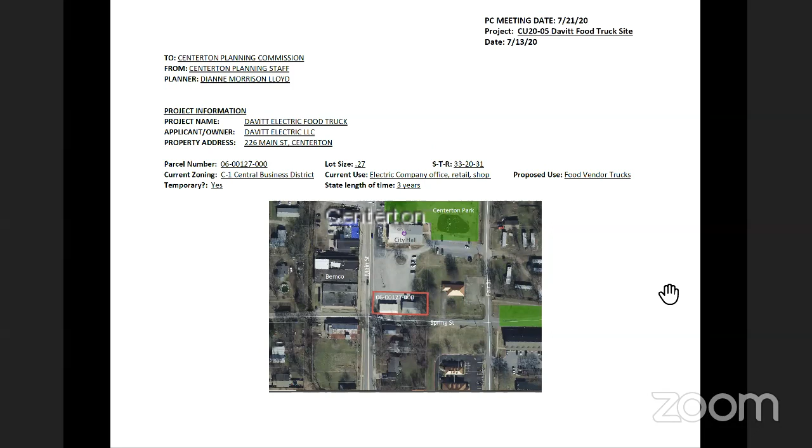All right, thank you. Dianne, do you want to take us through the proposal? Sure can. As Bethany stated, this property is by City Hall, on the south end, basically of the Bemco parking lot by Spring Street. It is zoned Central Business District, and they are looking for 3 years for this particular food truck. And like she said, it would be different ones, not just a certain food truck. It would be different vendors that would come into that location.

There has been a conditional use for a food truck previously, but it was north, kind of where the light pole is. Oh, thank you, Nicole, you're so good. But that's technically not their property. So we were looking to try to find a spot that would work for them on their actual piece of property there.

There's not going to be any outdoor changes or anything structural. The water, the tenant's truck or trailer will be self-contained. Davitt will provide electricity, which is very fitting since they are an electric company. The hours of operation will vary depending on whom is renting the space, probably between 8 a.m. and 8 p.m., nothing that's going to be really late. Typically it's going to be 1 to 2 people working there, since there's not a whole lot of room in a food truck. There's no signage proposed; any tenant would have to make an application to the city for a sign permit if they do any additional signage, like a flag sign or anything to that effect.

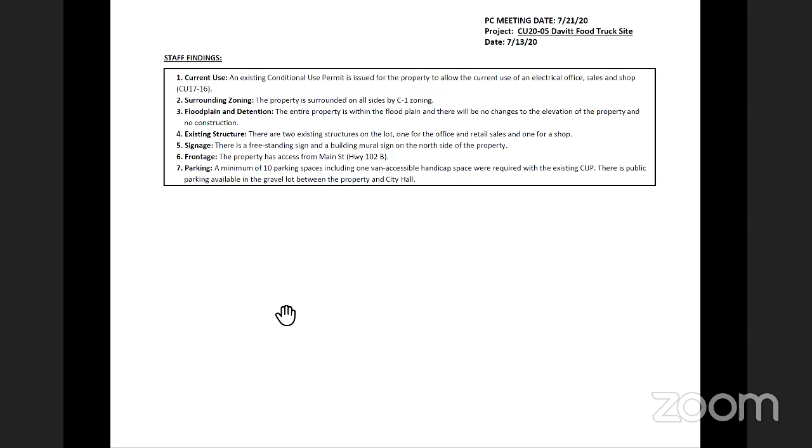Okay, Nicole, can you scroll over to some of those, please? There we go. They are requesting 3 years for this permit. If that is acceptable with you guys, you can do the 3 years, so it would not expire until 7/21 of 2023.

This would make it easier for the property owner, so they don't have to come in every summer if the snow cone person wants to be there, or every time they find a food vendor that wants to locate on their property, since it takes time to get all of this done. We have done 3 years before; I believe the one we just did for the Woo Pig Mooey was also a 3-year term.

One thing that's particular with this site, because of the regulation that the truck has to be 10 feet from the existing structure, one possible condition would be that any front-facing truck or trailer facing Main Street, not be longer than 19 feet, be kept on their property and away from the building.

Then I do have on here, as I said, that they have to have 10 parking spaces with their current conditional use. For a food vendor in the city, we don't have any specific requirements for parking at this time, but if you guys wanted to make any conditions on that, that would be up to you.

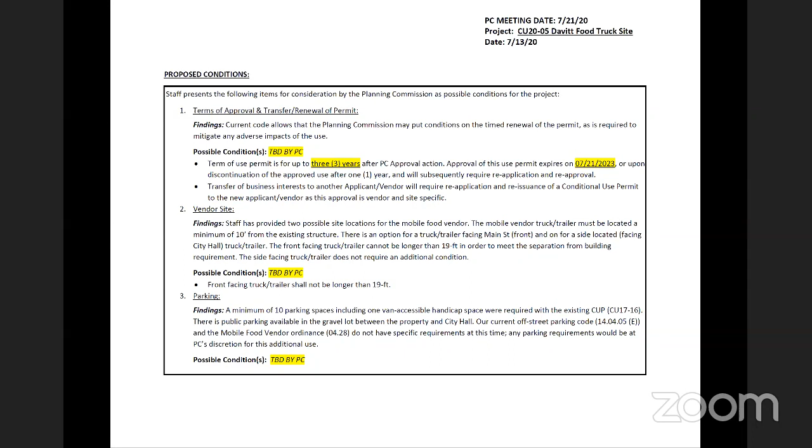Okay, do any of the commissioners have any other questions or comments in regards to any of the conditions, the 3 years, the maximum size of the truck, and the 10 parking spots, one of which will be designated van accessible handicap, which is actually already there.

Hi Jeff, this is John. I just had one quick question. It was mentioned about the electric requirement. Is there a requirement for additional trash or waste disposal or food disposal that would be required for that? Obviously not dumping food in a regular trash can. Is there an additional requirement for that, or?

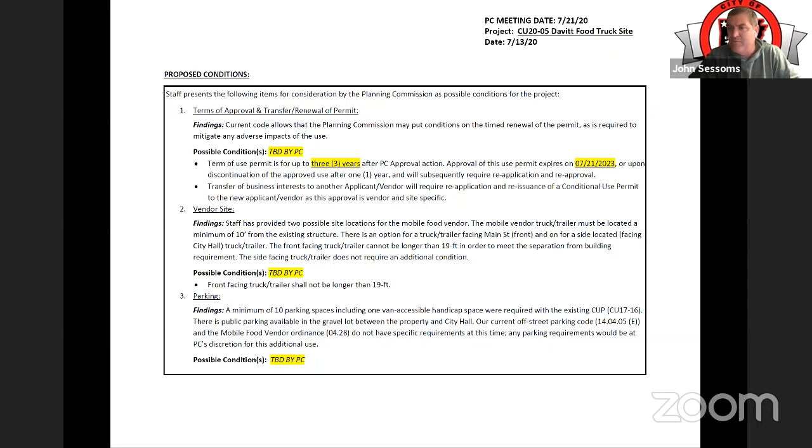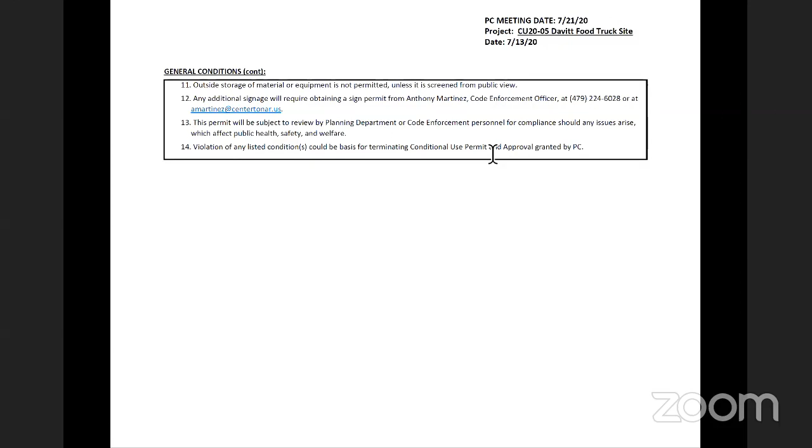We don't necessarily put anything on that. We would rely more on, I guess, the health department or whoever would approve it, to kind of police the way that they would take care of their waste. But as far as trash, like from the snow cones or the napkins and so forth, we do police that part.

If they were going to dump grease and needed a grease receptacle, we'd want to make sure it's in the right place. We've had some of those in the past where they've actually requested that, and we've talked about it having a designated spot.

Okay, that was more my question about hazardous disposal, not necessarily trash. Thank you. I think when I spoke with Bethany previously about water and wastewater, she said they would prefer people to have their own self-contained trailer or truck, so that everything goes with them or comes with them each day.

And Bethany, I will unmute you if you want to go ahead and answer that question, just to make sure I wasn't telling a fib on you. Oh, no. Can you hear me all right?

Yes. We fully intend for them to take any waste that they have with them. Of course, we like to keep it clean, so we won't be allowing anything to be junked up or anything like that.

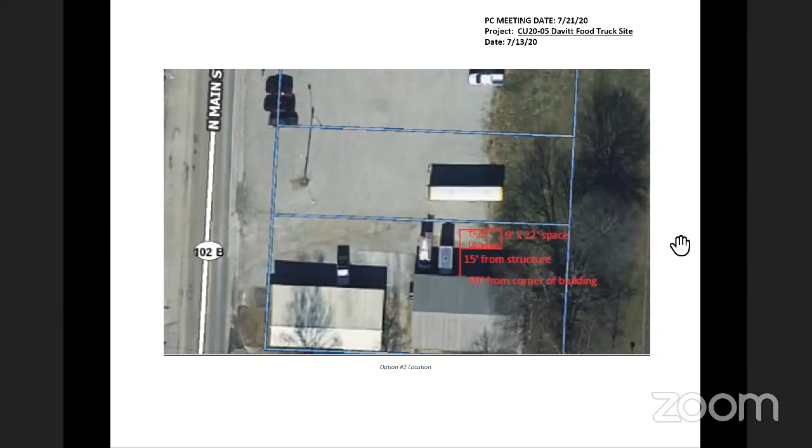They do have two options for the siting on that spot, and the condition would just be on option number 1 as far as the length. Okay, then I'm good with that, I guess, if everybody else is good with that. I just wanted to make sure you guys were all aware that it's basically the same space, just two options for how it would be sited on that spot.

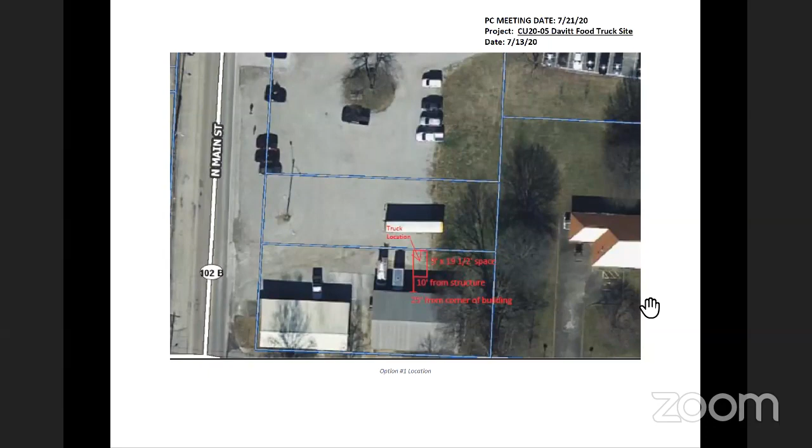Okay, and just option 1 with the north-south, the east-west facing truck, would have to be the 19.5-foot length maximum. You guys can say that in your motion however you like.

All right, if there's no other questions or comments from any of the commissioners, I would entertain a motion. I'll make a motion, this is Tiffany. I'll make a motion to approve conditional use 20-05 Davitt Electric mobile food vendor parking with the conditions as stated, depending on the orientation of the food truck, for a 3-year time period and 10 parking spaces, and any other comments that would be subject to this.

Devin, I'll second. All right, we have a motion and a second. Todd, if you'll do a roll call for me.

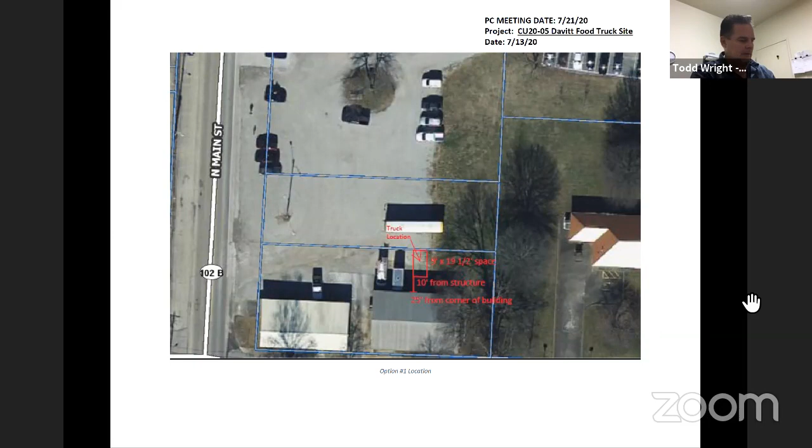John Sessoms, yes. Jerry Harris, yes. Tiffany Morris, yes. Amber Beal, yes. Greg Langford, yes. Devin Murphy, yes. Joey Engel, yes. And Jeff Seyfarth, yes. Thank you, Bethany, and good luck.

Thank you, guys. All right, next on the agenda this evening is our second public hearing. This is for rezone 20-14, Steel Development, Fox Haven on Bliss Street. This is from A1 to R3.

And so with that, I would entertain a motion to open the public hearing. This is Amber, I'll make a motion to open the public hearing for rezone 20-14 Steel Development Fox Haven from A1 to R3. This is Joey, Tiffany, I'll second. All right, we got a motion and a second.

Is anyone opposed? All right, is either Tony or Ferdy on the phone to give us an overview? Ferdy is there and you should be unmuted, Ferdy. Hey, Ferdy, do you just want to give us a quick overview? Try now. There we go. He's good. Hello? Yeah, go ahead, Ferdy. Okay, good deal.

Okay, so this request is for a 2-acre rezone that's south of a 4-acre request we made earlier this year, which we had to do because of the lot split we submitted last year. Since then, we've actually decided to proceed with the subdivision here, so we had to add this area to the south of that request to allow that subdivision to proceed.

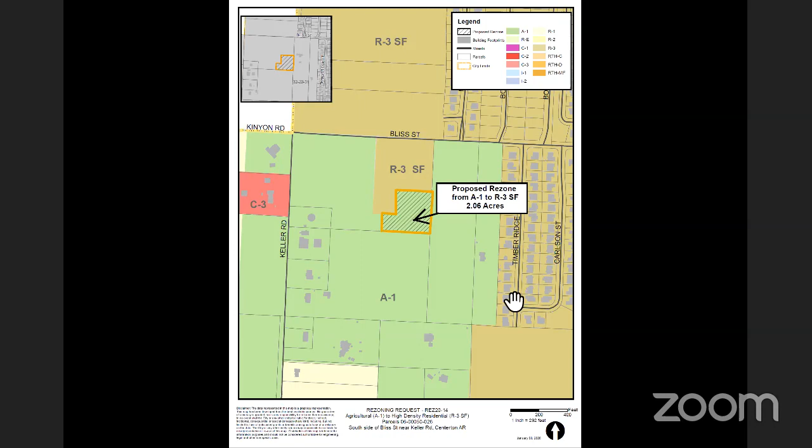Of course, the high density residential is intended for single family dwellings with minimum lot size of 6,000 square feet, with 25-foot front, 20-foot rear, and 7-foot side setbacks. The access would of course be there from Bliss Street, which is designated as a collector on the current master street plan.

Which has a minimum of 60 foot of right of way. And with their subdivision, they are going to be dedicating right of way for the future street improvements there. On the proposed master street plan, whenever that is finally done and approved, it is going to be a minor arterial with 90 feet of right of way. Since this is just a rezone and not the subdivision, I can't tell you the exact right of way being dedicated, but I know it definitely meets the current master street plan.

It is surrounded, as you see, by A1, but anything that is not the agriculture property is R3, which is what they are requesting to be rezoned to. So we do consider this to be compatible with the adjacent zoning. The current land use plan does show this as a mixed use area, so that means you could have high density residential, commercial apartments, all kinds of different things.

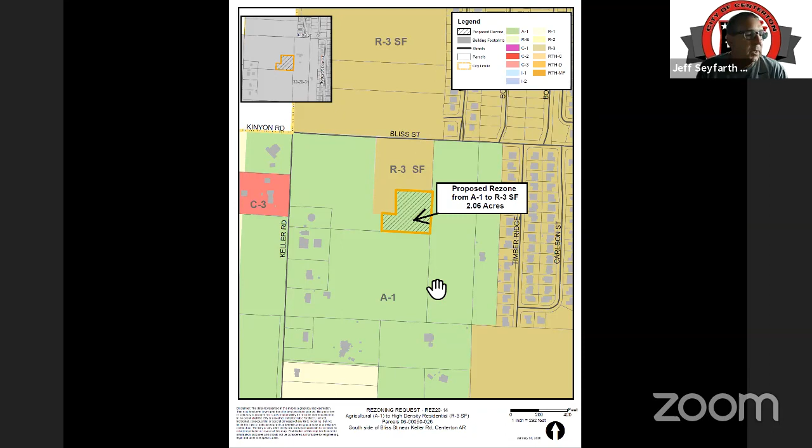All right, let's go ahead and go through our considerations that we have to go through. And the first one is, is the rezoning consistent with the adopted comprehensive plan, including the adopted land use plan? If not, why? I would say that, based on the plan that's there along with the surrounding property, that this one would be consistent. Does anybody disagree with that? So Todd, we're okay on that one as well.

Is the proposed rezoning compatible with the surrounding area and zones? Again, there is some high density single family residential around, including the parcel that's going to be with this. Does anybody disagree that this would be compatible with the surrounding area? So Todd, we're good with that one.

Would all the permitted uses in this new zone be compatible in this location and surrounding areas? They are asking for R3 single family, so this one would, in my opinion, be compatible. Does anyone disagree with that?

Would the rezoning provide a benefit to one landowner but not be considered for other similar properties in this area? I'm going to say the answer is no on this one. Would you all agree with that? And then if the public is opposed, why? Are the objections based upon factual information relating to this request or opinion based? We had no public comment, so we're okay there.

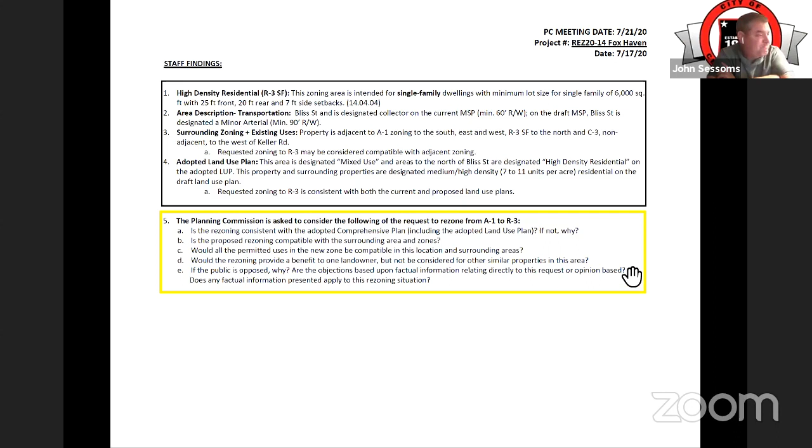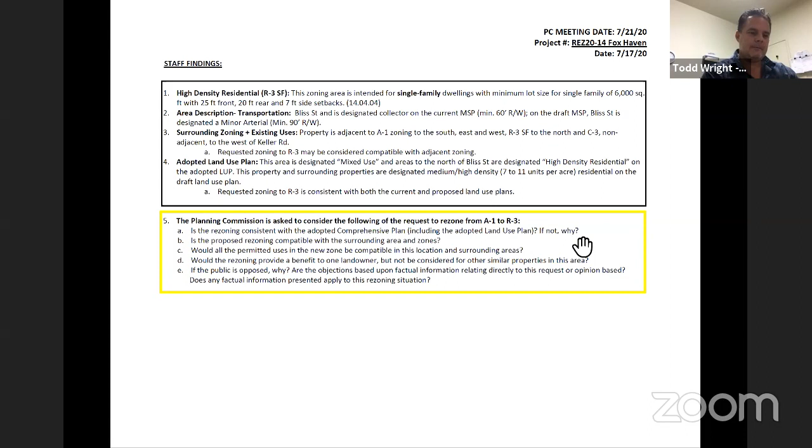We'll start with you again, John. John Sessoms, yes. Jerry Harris, yes. Tiffany Morris, yes. Amber Beal, yes. Craig Langford, yes. Devin Murphy, you bet. Joey Engel, yes. And Jeff Seyfarth, yes. All right, thanks, Ferdy.

Thank you very much.

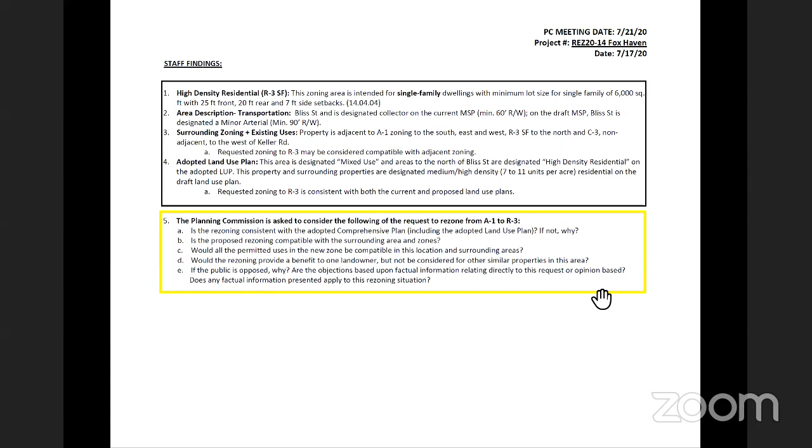All right, next on the agenda this evening is development 20-03, the Woods Commercial Development. This is at 5830 Brookside Road, and this is I-1.

Donna, do you know if they were able to jump on yet? I see Tim, but I don't see Ken. Tim, are you speaking, or should we postpone this until Ken gets here? Tim, are you there? We're all here. Got the client and Ken and I together. Okay, perfect. Thank you.

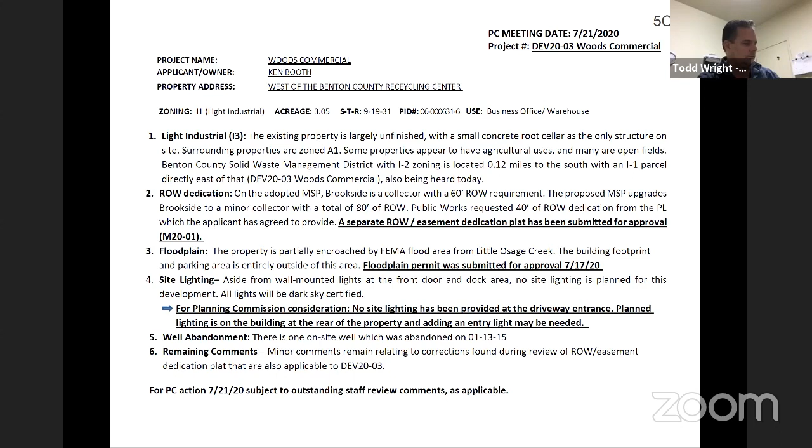Do you guys want to go ahead and just give us a brief overview for the planning commissioners? Yes, be happy to. Basically, we've got a commercial project on Brookside Road. You had actually seen a commercial development and approved a large scale several years ago, I think, on this piece of property with maybe 3 or 4 different buildings. Basically, that development didn't go through, and our client, Greg, has purchased that and wanted to downsize that commercial operation to fit his needs.

So we've got a lot less footprint of pavement and buildings that will be going on this site. It's next to the Benton County Recycle Center on Brookside. Mr. Woods runs a business doing insulation work and other specialty work for residential construction, so subcontracting work. This will be his office and warehouse location for him and his employees. Be happy to answer any questions you all may have.

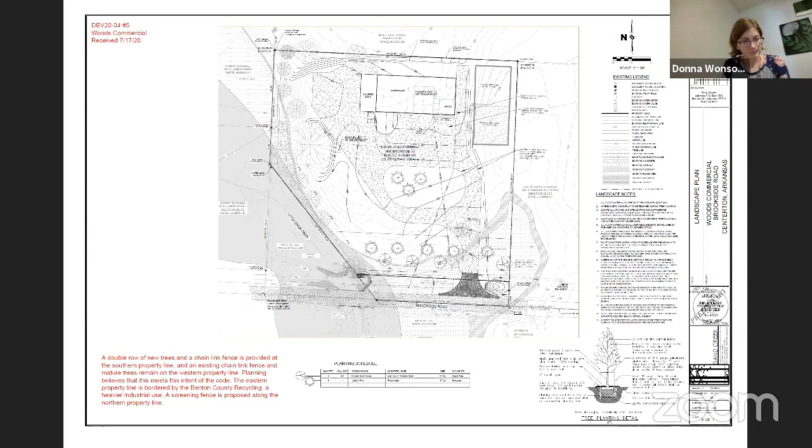Thanks, Donna. Tim, can you confirm the two things that were in question? One with the activities within the building, and then the second one, the maximum of 30 people?

Yes, and I'd like to, Jeff, if I could just kind of go through several of those comments. As far as the number of employees, Greg has 12 employees. And this also speaks to the parking. He's got some employees that come to that building in the morning, leave their car, get in a work truck, maybe pull a trailer, and go to the job site. It's about half and half, those that go to the office versus those that drive their personal vehicles to their job sites. So we feel like we've got more than adequate parking, but he's got 12 employees currently.

The operations internally are, again, warehouse, shop area, and a small office. Greg does not really have any customers that necessarily come to his office as part of doing business. He works for other builders as a subcontractor, and he may on occasion have somebody that does some railing on their home that would need to go to his office, but that's a rarity.

With regard to the employees, and then you had another one, Jeff, the activities carried out within the buildings. Okay, so unless you've got any other questions about what goes on in the building, I can let Greg speak to that if you'd like.

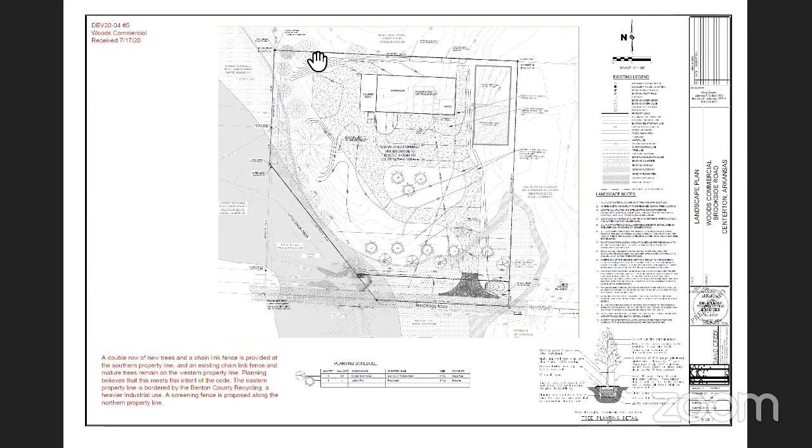The next item I wanted to deal with were the comments regarding the trees. We've been asked several times by staff to protect the tree on the north property line. There's been some comments regarding the retaining wall that has to be built. They're about 5 feet off the north property line. That tree is actually about a 12-inch wild cherry. I don't know that we could actually kill it if we tried, but in providing the screening fence, that tree's going.

Greg has talked to his neighbor to the north, and the neighbor has no desire to keep the wild cherry tree. So as far as that particular tree, the plans are that it gets removed when we build the screening fence. With regard to all the other trees, we have tried to design the site in such a manner as to allow for that existing vegetated buffer along that primary drainage way on our west to remain.

The trees that are showing are not all the trees that are there. There's a substantial green buffer along the perimeter there to our west. If y'all have been down Brookside, you know what I'm talking about, right there by that big drainage way. We're endeavoring to try to keep those trees.

We don't want to lose them, but in the same token, we're really not planning on paying an arborist to come out and tell us how to either regrade the site or put up a retaining wall to try to save the trees. We're going to try to save them, hopefully we can do that, but unless it ends up being a requirement of the approval of the large scale, that's the extent of what we're planning for.

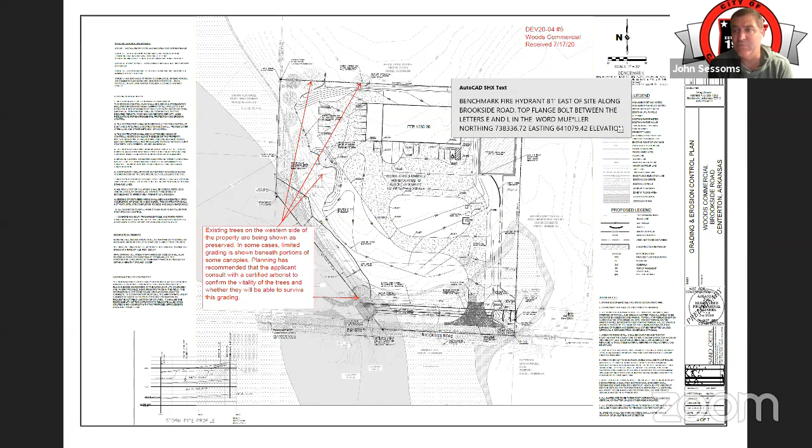Nicole, can you show me, or whoever's driving right now, can you show me where that actual electric pole's at? Is that where your hand's at? It wasn't letting me use the space bar, and I had to move my mouse to unmute.

So I believe the pole is right here. Is that right, Tim? Yes, that is correct. That's where the electric pole is. And again, we're happy to look at that. Greg doesn't want a dangerous situation on his drive.

I don't know that you don't get deliveries real early or late, and we got winter months. But guys, I'm going to just say this, it's just me being who I am. They race Mulholland Drive at night for a reason, because you can see the headlights coming. So at some point, if we're worried about the dark and deliveries and stuff like that, that street light's not helping.

If there's pedestrians walking up and down there, because we eventually have street improvements and sidewalk, now that's a different issue. But if we're trying to really light up that entry, I don't know that you're solving anything with requiring a light, just because at night you're going to see all the lights. They're going to shine brighter that you got a truck there.

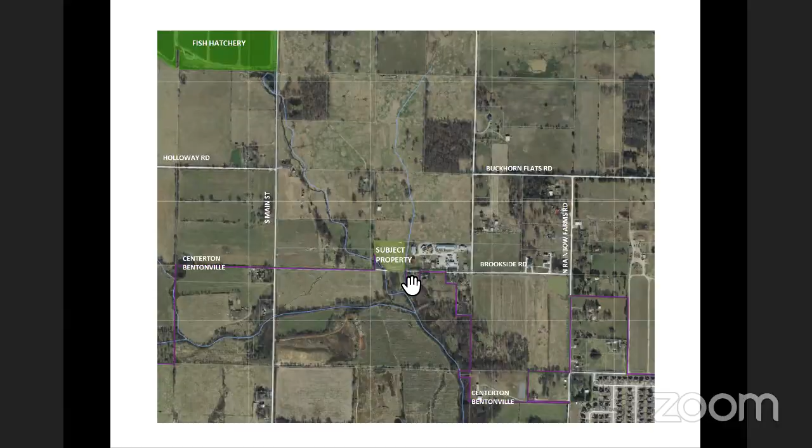I haven't driven that road in a while since I haven't been going anywhere, but what's the ditch like along that roadway? Right now there was an old drive into that property with a small culvert. Rick might know what size it was, but I think it kept washing out, and ultimately the street department took it out because it was causing maintenance problems.

So right now it's a pretty deep and ragged ditch in places. What we have on the plans is we're replacing that ditch with twin 42-inch pipes with headwalls on either end. So the ditch along our frontage will go away, other than right at the southeast corner where I have to accept water coming onto us from the east, and then on the southwest corner it discharges by the bridge. So the ditch along our frontage goes away other than in the southeast corner.

This is Lorraine. I've been driving through there, and the Pattersons usually have a light on. I noticed you were putting in a different drive into the property, so I don't know that it's that important to have lighting at this time, but during the winter months they may find that they need it, and I'd recommend they relook at that then.

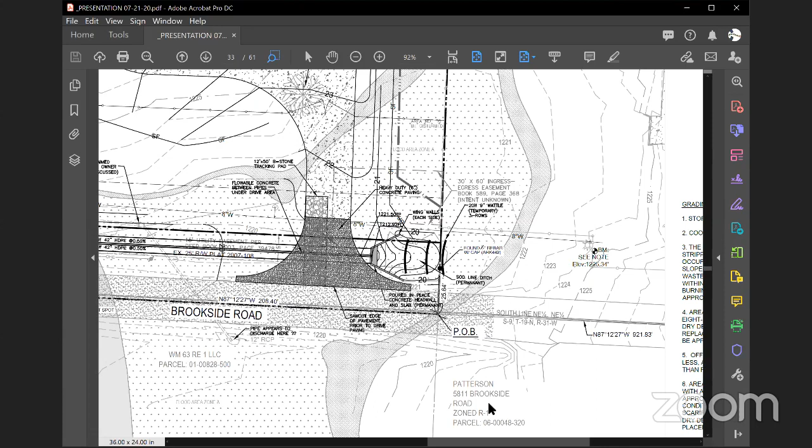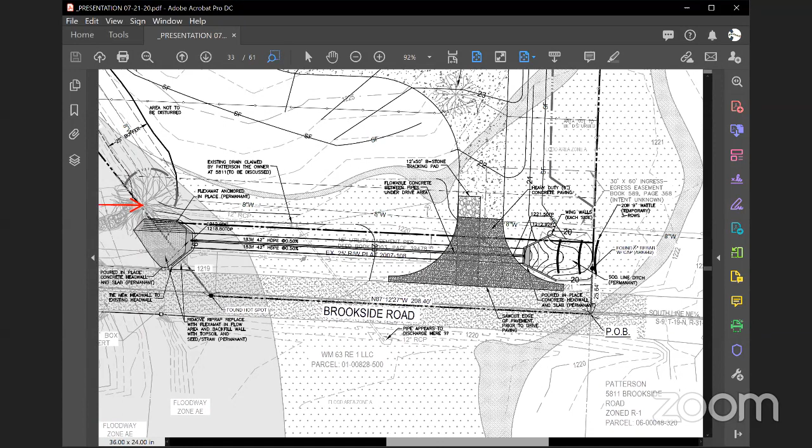In times past, that problem was alleviated because there was a retention pond up there on the north side, by the recycling center. I own that 40 acres on the north side, so I'm pretty familiar with it. When it came a big rain, that retention pond, which consisted of nothing more than a farmer's retention pond made of rock, worked. When the planning commission okayed removal of those rocks, the water would actually back up plumb over to the north side of what was then the 40 acres.

So that's what exasperated the whole problem, that retention pond was removed. And in addition, the retention pond on the east side of the recycling center was removed as well. When those two things were removed, that's when the problems occurred.

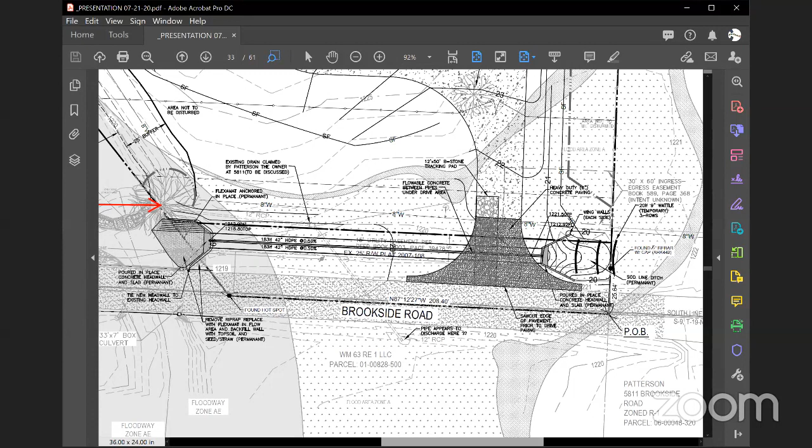Yeah, but this is our water rights, right in here where they've got this little setup, wherever the electric pole is, due east, where that aqueduct runs. This is Lorraine - the 12-inch pipe that comes from the stream, then goes to the drain and then to your property, that is remaining from what I see.

Yes ma'am, the pipes - how are they going to remain? The only way that could remain... Go ahead. No, I'm looking at the elevations, and Tim would probably have to answer that, but I'm assuming the elevations of the pipes will be different.

Ms. Patterson, I actually brought that to Tim's attention on the first review, and I think he's made arrangements for that. Tim, you need to address that, but that was one of my first comments, that you needed to address that, and I think you did as we went along, if I'm not mistaken.

Yes Rick, there's several questions here. One, the Pattersons have already sold the property that this water serves, but this water pipe we're talking about, the 12-inch, actually serves the old minnow ponds and fish ponds. It's very shallow. To accommodate the stormwater we've had to accommodate, and also provide cover on the pipes, the existing pipes are much deeper than originally designed. There is ever so slightly enough clearance between our pipes and that 12-inch line. So we did get it to work out. That 12-inch line can stay.

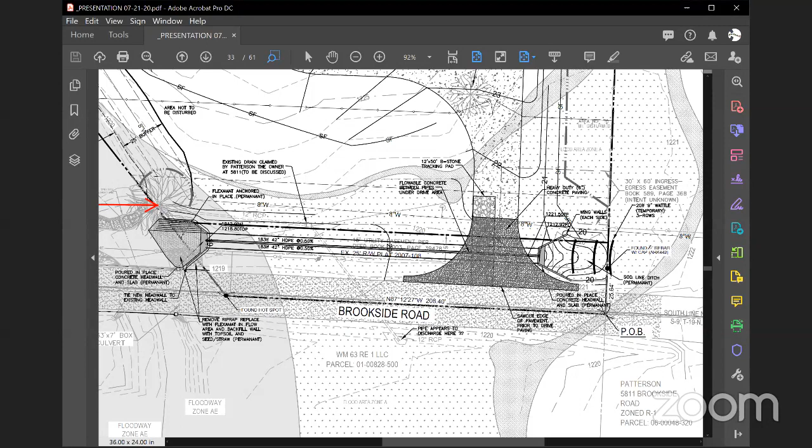I'm not an engineer, but the way it stands right now, that 42-inch line would need to go underneath the existing 12-inch aqueduct. Is that what you're saying? That 42-inch line will go underneath the existing aqueduct? That is correct. Okay, that makes sense. Okay, I'm happy with that. Yes. Okay.

All right, thank you guys. And understand that any lighting that gets proposed must remain within the parcel, if you will. So there shouldn't be any light that would directly impact you. Understand that whenever we consider this plan. Okay, thank you, thank you guys. All right, so thank you.

Any of the other commissioners have any questions, comments, or concerns in regards to the plan? This is Joey, I'm good. Jeff, I think you hit the nail on the head - no retail, I'm not sure there's a need for a light there.

Yeah, I guess we could ultimately leave that open pending conversation with the adjacent landowner. With an agreement, I think that's fair. We could approve it that way and allow the developer to make that decision, but share back with planning so we'd have a record of it in case it came up in the future based on the development requirements. Maybe a little letter would work for everybody.

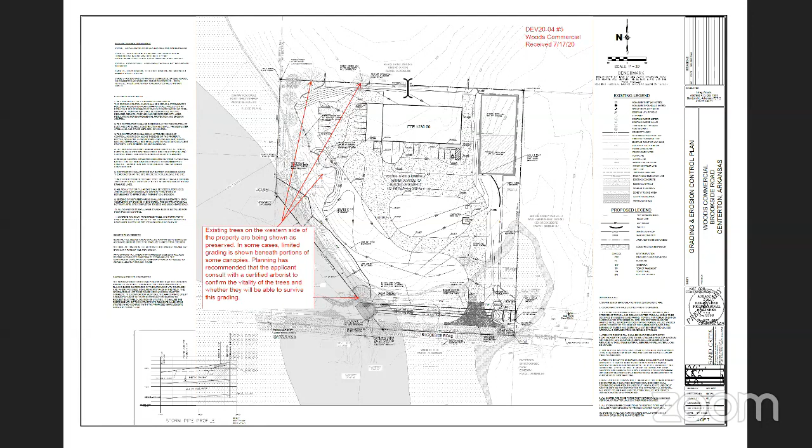Well, the plans say 270 feet. I can't really tell where it stops because it's right on top of the property line. Yeah, it looks like it goes pavement to pavement, the edge of the pavement. It basically extends from even with the west edge of pavement, if you extend that west edge north, and then on the east side, if you extend that edge of pavement north, that's about the extent of it, I believe. Yes, it's hard to see, but it's right in there with the property line.

So I think we should be sufficient with that, because that would also try to keep those trees that are in - is that the northwest corner? Yes, yep.

Does that work, Nicole? I think so, I just wanted to make sure that was clarified based on your guys' recommendation to work it out with the adjacent owner. Yeah, I do think the plans could show better where that fence ends and begins - I can see the little circles. And I know on the east side we weren't worried so much about it because it's I-2. The only place that really has a gap is around the septic area, and I don't know how many feet that is.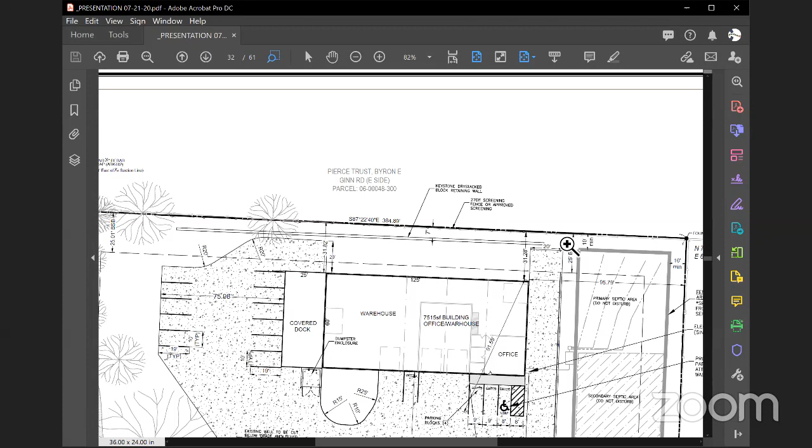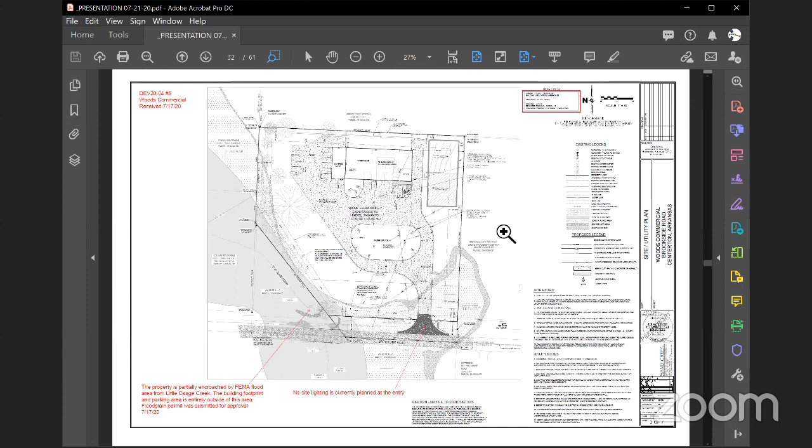Yeah, and I know we said letter and that's probably okay, but would it make sense, Tim, just to update this and provide it back to us once you guys reach your decision with the adjacent owner so it would be more clear regarding that landscaping to the north? Okay. Yeah, we'd be happy to do that. I'll let Greg talk to the owner, and if we need to change it from the screening fence to show evergreens, we'd be happy to make that change. Okay, thank you.

Any other questions, comments from any of the commissioners? Just to be clear, y'all are alright with us doing some other more decorative type fence up front?

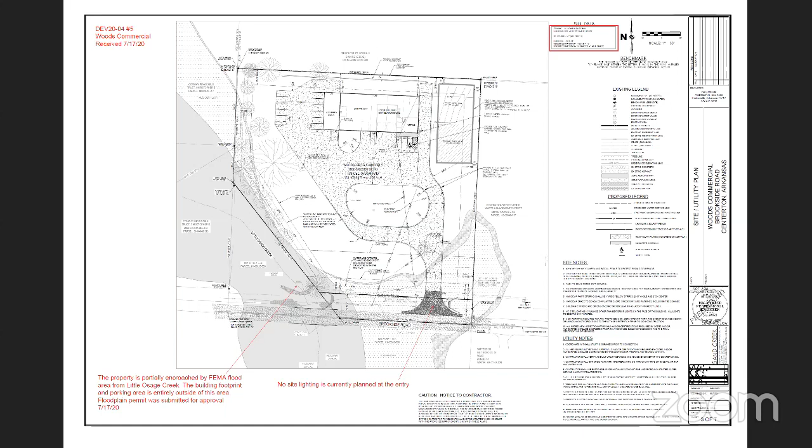Absolutely. Okay, thank you. No, we want it ugly, Tim. I just wanted to be clear, I don't want to assume anything. Okay, Lorraine would be even more excited if you put trees around it or something like that. So careful, Tim, what you're asking. I would imagine Glenn and Judy probably would be happy with a pretty fence too, or nicer fence. Yes. Hey, can we transplant that cherry up front by the gate? Joey Ingle, would you please just give me a break? I think we should make a table for the office if that's the case, I'm smoking some barbecue with that thing.

All right, if there's no other comments, then I would entertain a motion for Development 20-04, the Woods Commercial Development, which again is at 5830 Brookside Road, and it is I-1.

Joey, I'll make a motion to approve development 20-04, Woods Commercial Property. Devin, second.

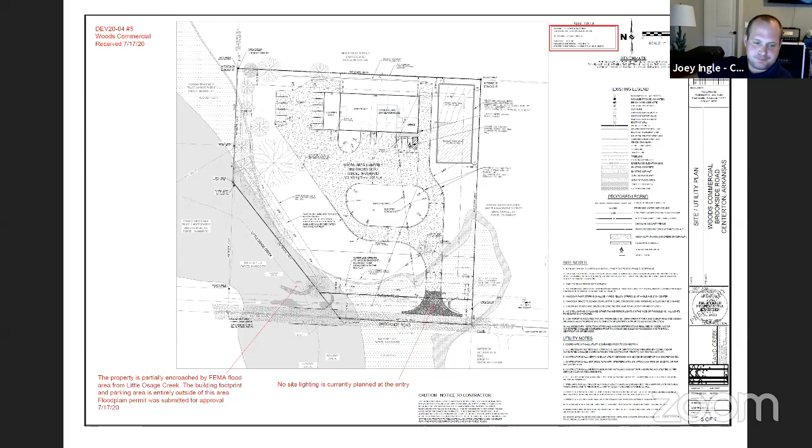All right, we have a motion and a second. Is anyone opposed? All right, thank you, Tim and team.

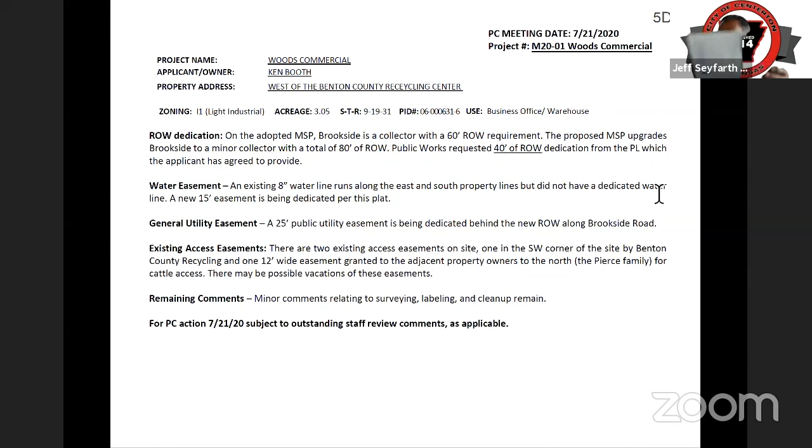All right, next on the agenda this evening, I believe, is Tim as well. This is MP 20-01 Woods right-of-way and easement plat. Again, it's at 5830 Brookside Road, and it is still I-1.

Yeah, I can discuss this if you'd like. Basically with this, because of the future master street plan, there's a right-of-way dedication that needs to occur. We've been going back and forth over the dimensions, but this is actually the dimension that is now going to be showing up on your hopefully future accepted master street plan. In addition to that 40-foot right-of-way dedication, there's an additional 25-foot utility easement that is being dedicated to also cover the existing water line that's out there.

We've also got those storm sewer lines. Actually, the storm sewer lines fall within the right of way. And then there's an additional water line easement for Centerton Water that angles up to the northwest, which was located in the field, and there wasn't a good easement on that line. So this is actually dedicating a good easement for where it is located.

There's a couple of existing easements shown on this plat as well. There's an old ingress egress easement on the southeast corner, 30 by 60, that goes over to the county property. That was there, as far as I can tell, for the old adjoining property owners to share the drives. Really, it doesn't need to be there anymore, but nobody's pursued vacating it. The county facility is surrounded with chain link fence. And then there's an old easement that exists on the northwest side allowing the neighbor to the north to access the water for his cattle.

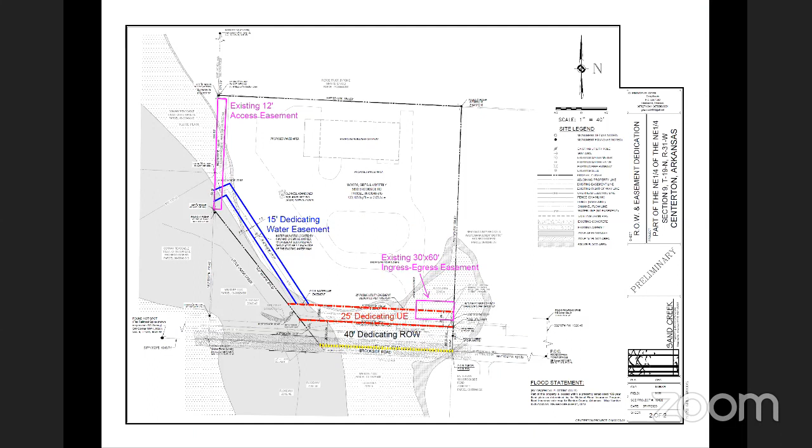Any comments, questions, concerns from any of the commissioners? Now, are we acting on this as a separate item compared to the large scale? Yes, that's my understanding. It is a separate plat. It does have a separate number in the planning system, and this one is going to be recorded and the other one will not. Gotcha. And Planning comment, all comments relating to this one are minor.

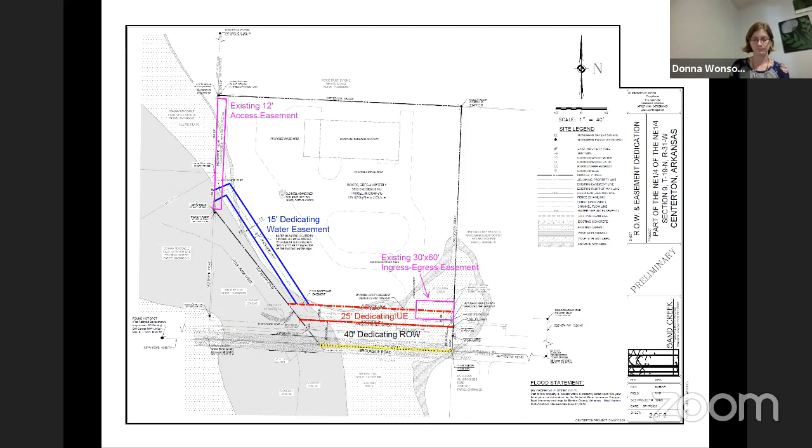Jeff, can we make a motion? Yes, this is Joey. I'll make a motion to approve MP 2001 Woods right-of-way plat. This is Tiffany, I'll second. Okay, we have a motion and a second. Is anyone opposed? All right, thanks, Tim. Thank you all.

All right, next on the agenda this evening is tract splits 20-10. This is for the Bentonville School District number 6. This is the Grimsley Junior High property, tract 1, looks like 27.44 acres, and tract 2 at 48.41 acres.

Is Paul going to give us just an overview of what they want to do, or Donna, are you going to cover it? Paul is here, but his hand is not raised. So Larry is here. All right, Larry, you just want to give us a quick overview?

Am I in? All right. You'll have to turn your volume down though, because we're getting a lot of feedback. Okay, is that better? Perfect.

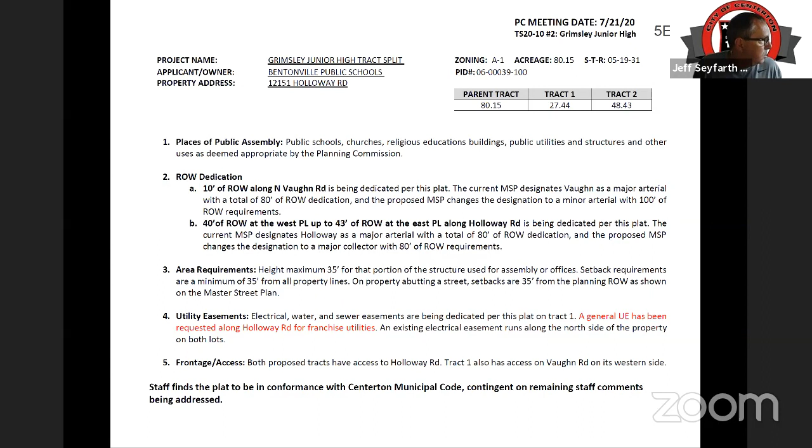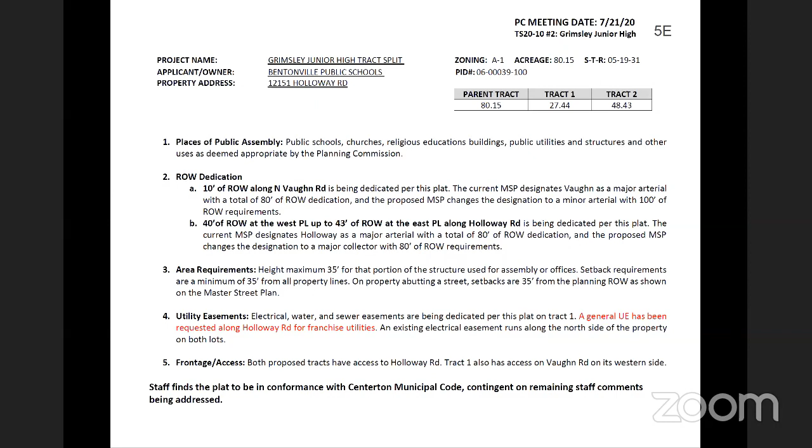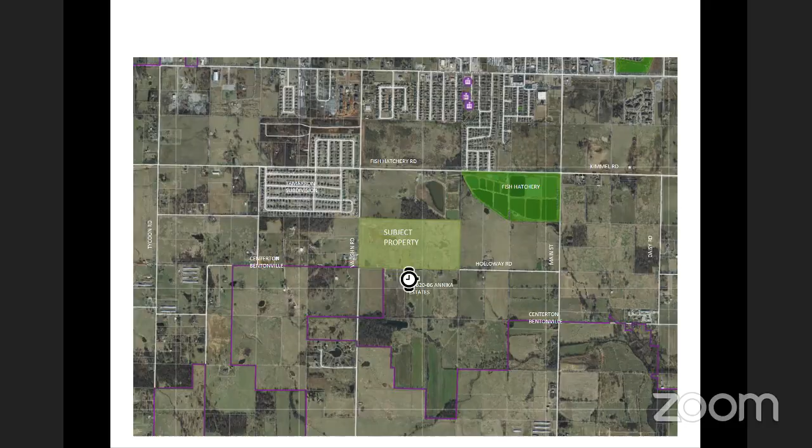This is Larry Grelly with Morrison Shipley Engineers, representing the Bentonville School District. As you said, they are proposing to split their 80-acre tract, located at the northwest corner of North Vaughn Road and Holloway Road, into 2 parcels. Tract 1 is approximately 27 acres, the location of the newly constructed Grimsley Junior High School, which has access to both North Vaughn Road and Holloway Road. Tract 2 is approximately 48 acres and is currently undeveloped, and it will only have access to Holloway Road.

So the plat will also provide utility easement dedications for water, sanitary sewer, and electric, as well as right-of-way dedications along the east side of North Vaughn Road and along the north side of Holloway Road to meet the requirements of the city's master street plan. Not really sure what else there might be, but I'll be happy to answer any questions you may have.

All right, thanks, Larry. Donna, do you want to go ahead and give us a quick anything additional? Sure. We did get another set of plats at about 4:30 today, so I've not had a chance to review those. So I will be giving you this presentation based on the last set of plans we received. This is a place of public assembly. The setbacks and such are based on the use rather than the zoning.

The right-of-way is, we are getting right-of-way dedication, 10 foot along North Vaughn Road and a variable right-of-way dedication along Holloway, 40 foot of right-of-way on the west property line, up to 43 foot of right-of-way on the east when it gets up to tract 2. For places of public assembly, there is a maximum height of 35 feet, and setback requirements are a minimum of 35 feet from all property lines, and 35 feet from the planning right-of-way.

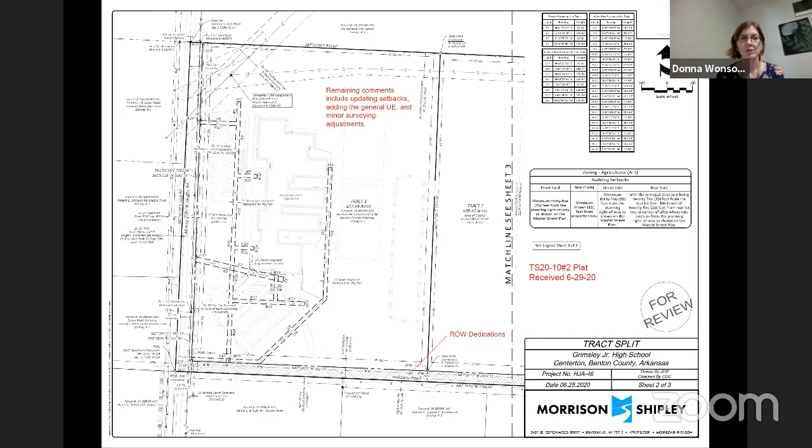All right, I do want to give the person that was trying to communicate with us one more opportunity before we move on. So I don't know, Diane or Nicole, if that person's still there and available, if we want to try to communicate with them one more time. They are still there and they are unmuted. So let's see if technology works this time.

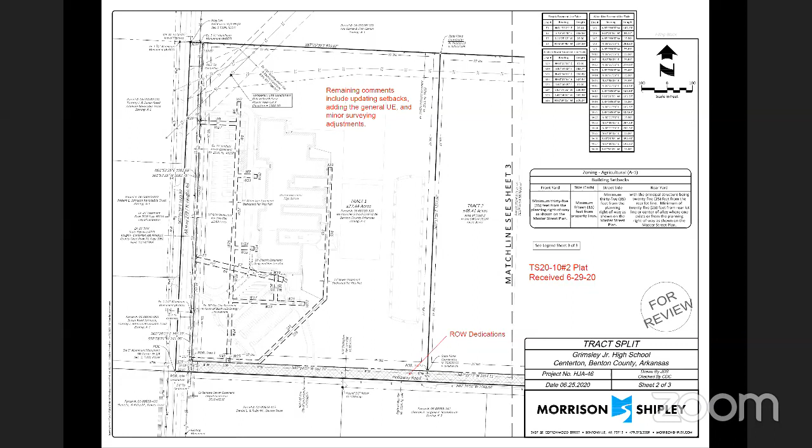Thank you. So the person that's trying to communicate with us, can you, if you're unmuted and available to speak, let us know? And then we would ask that you give us your name and address so that we can have that for the record. And again, if you're not able to communicate either via the phone or computer audio, I would offer up the option from a Q&A perspective. On your screen there should be a Q&A option to select, and then you can type your note, and the staff can respond to that as well.

Well, unfortunately, I don't think that we're going to be able to communicate at this time, so I'm going to go ahead and continue with the meeting. If that person is able to communicate, if someone from the staff will just let me know, or Todd, maybe if they pop in a question on the Q&A, then we can go back and talk to the individual. Okay, but I'm going to go ahead and move forward with the meeting.

If there's no additional comments, questions, or concerns from any of the commissioners, then I would entertain a motion for the tract split 20-10 with the Bentonville School District. This is Tiffany, I'll make a motion to approve tract split 20-10, Bentonville School District number 2. This is Craig, I second. Okay, we have a motion and a second. Is anyone opposed? All right, thanks, Larry.

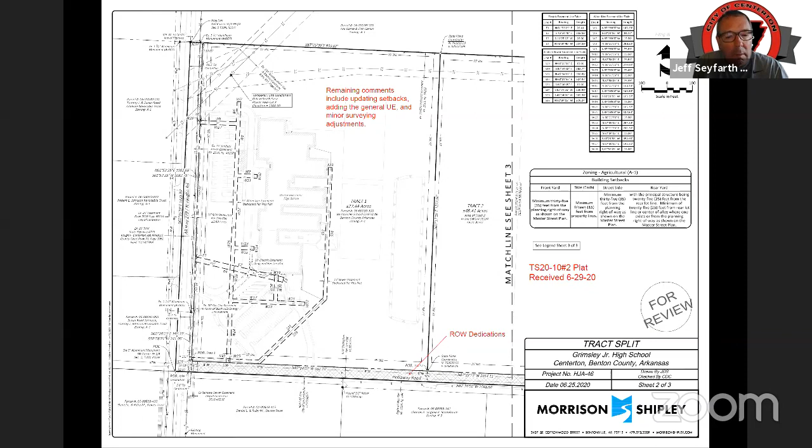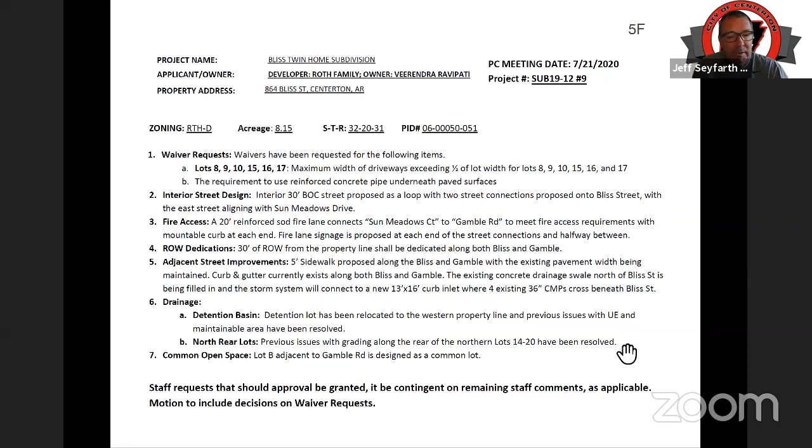All right, next on the agenda this evening is subdivision 19-12, the Bliss Street Twin Homes. This is a preliminary plat and plans, again at 864 Bliss Street. It is RTHD, there's 46 lots on 8.15 acres. So it looks like, Christian, are you on to give us an overview?

Christian is out of the office. This is Brett Watts with Bates and Associates. Okay, was it Brett? Brett, B-R-E-T-T.

Okay, go ahead, Brett. All right, what you have in front of you is the preliminary plat for the Twin Homes subdivision on Bliss Street. We're dedicating right of way on Bliss Street and Gamble Road per the master street plan.

And as stated in the report, we have two variances that we're requesting. One being for the increase in driveway width, and also using high density polyethylene pipe instead of reinforced concrete pipe in paved areas. If there are any questions, I'll be here to answer them.

All right, thanks, Brett. Let's see, Donna, do you want to go ahead and give us an overview from staff on this one? Sure. Their waiver request, it's not a variance. The first waiver request is for the maximum width of driveways exceeding half of lot widths, and staff has gone through and reviewed them.

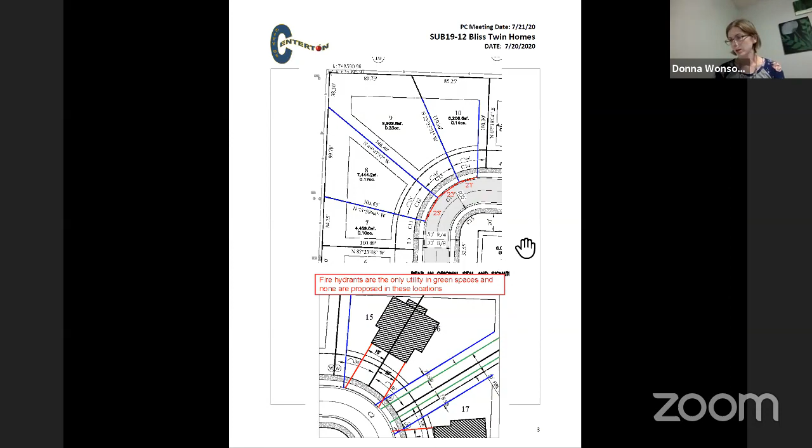As was stated, this is a redesign from a project you have seen before on 421. There has been a slight reduction in the number of lots, and the detention pond was relocated to the east side.

The interior street design is a loop with two street connections proposed onto Bliss Street, with the East Street aligning onto Sun Meadows Drive, 30-foot back of curb. There's a fire access onto Gamble, a 20-foot reinforced sod fire lane. The apron is concrete where it connects onto Gamble, with a mountable curb on each end, and fire lane signage is proposed at each end of the street.

Right of way, 30 feet, is being dedicated on Bliss and Gamble. Adjacent street improvements include 5 feet of sidewalk proposed along Bliss and Gamble, with existing pavement width being maintained. Curb and gutter currently exist along both streets. The existing concrete drainage swale north of Bliss Street is being filled in, and the storm system will connect to a new 13 by 16-foot curb inlet where four existing 36-inch CMPs cross beneath Bliss Street, at the request of Public Works.

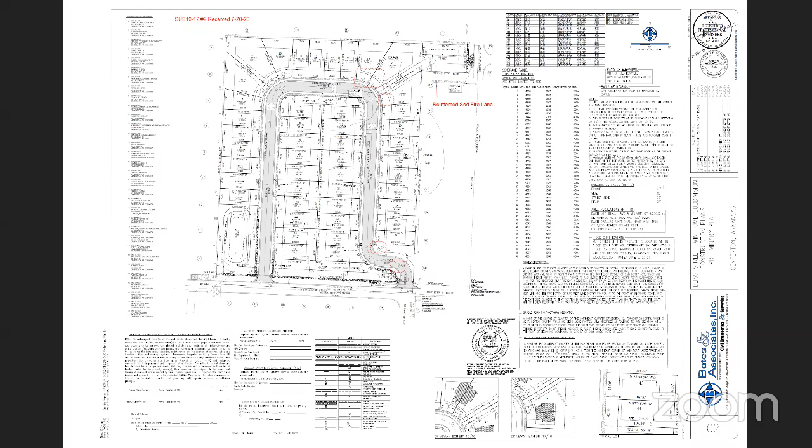All right, if there are no other questions, comments, or concerns, I would entertain a motion for subdivision 19-12, the Bliss Street Twin Homes preliminary plat and plans.

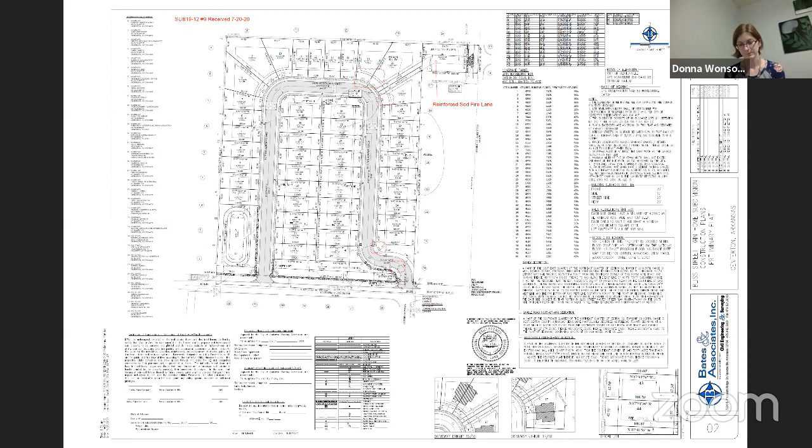I'll make a motion to approve subdivision 19-12 Bliss Street Twin Homes preliminary plat and plans. Do we want to approve the waivers as well? Oh, and also approve the waivers therewith. I'll second that. All right, we have a motion and a second. Is anyone opposed? All right, Brett, thank you. And I know Christian took the feedback from the first meeting, so I appreciate it. Thank you, guys. Thank you.

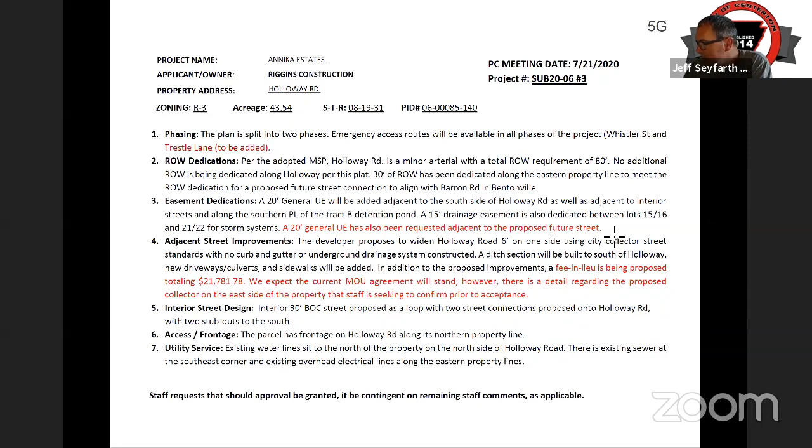All right, next on the agenda this evening is subdivision 20-06 Annika Estates, preliminary plat and plans. This is on Holloway Road. This is R3, 139 single family lots, 40 acres. It looks like either Kevin or Patrick, maybe from the development perspective, to give us an overview.

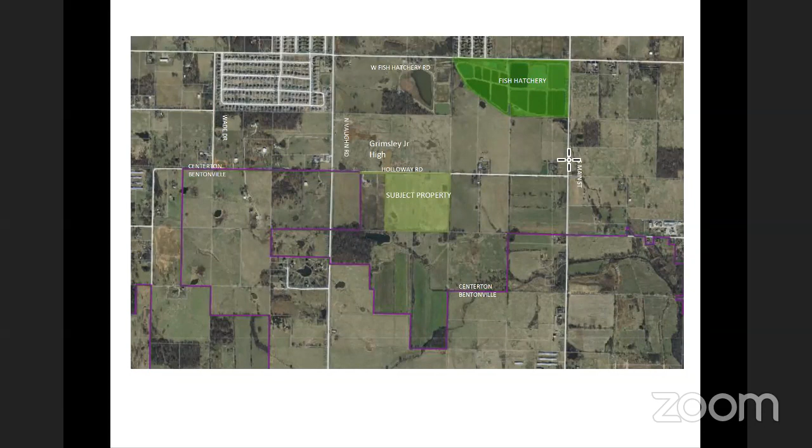Hey, this is Patrick Foy with Morrison Shipley. How are you guys doing tonight? Good. Just want to make sure you could hear me. So we're proposing a 140 lot subdivision total. We'd like to phase it, phase one, phase two. Phase one will be a total of 72 lots. We're proposing to dedicate all required utility easements within the subdivision and then along the south side of Holloway.

I've worked with the fire chief on the phasing to meet the diagonal rule. We're proposing to put in the base for Whistler Street, shown on the east side of the subdivision, to give them fire access throughout phase one. For drainage, we've got two detention ponds, one at the northeast, one at the southwest corner, to mitigate any increased flows. We've also worked with the city engineer and Public Works on a fee in lieu of improvements to Holloway Road. Based off the last comments I've seen, they approved what we had. But in general, that's a quick overview. If you guys have any questions, let me know.

All right, thanks, Patrick. Donna, this is you again. Yep, I have a lot tonight. So like you said, there are two phases to this project. Generally, there is some emergency access which fire would like added to the north side of Trestle Lane. I believe I sent comments to that. If I did not, I will send shortly.

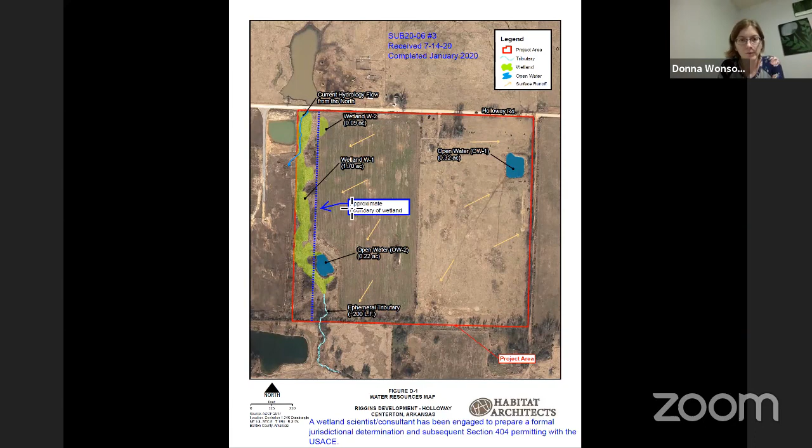One of the items that we would like to get resolved is the maintainable area, because it goes down to about 5 foot, and we have a requirement that it be 10 foot. But that is one of the comments that we still have remaining.

Hey Patrick, this is Joey. On the detention pond, I just want to be fair. We've been pretty amenable in the past on this requirement because it's an old requirement from when the city was maintaining ponds. This will obviously not be a city maintained pond. If you think you can hit that requirement, great. If not, right now is your time to talk about it.

Yeah, I was going to suggest or ask if we could go ahead and just get a waiver on it. We're showing 4-to-1 slopes and we're going to have a 5-foot flat spot at the top of that basin. That should be more than enough to get a tractor or anything that's going to maintain that pond around it. With today's improvement in equipment, it's not necessary to have that huge maintainable area.

Right. So looking at it, we don't think we can get 10 feet. Looking at what's on the screen now, there's maybe 3 feet we can get, so we're at 8. I'd just say, frankly, what you're proposing with the 4-to-1 and a 5-foot and 10-foot in some areas, that's more than we get in most places. I would support the waiver.

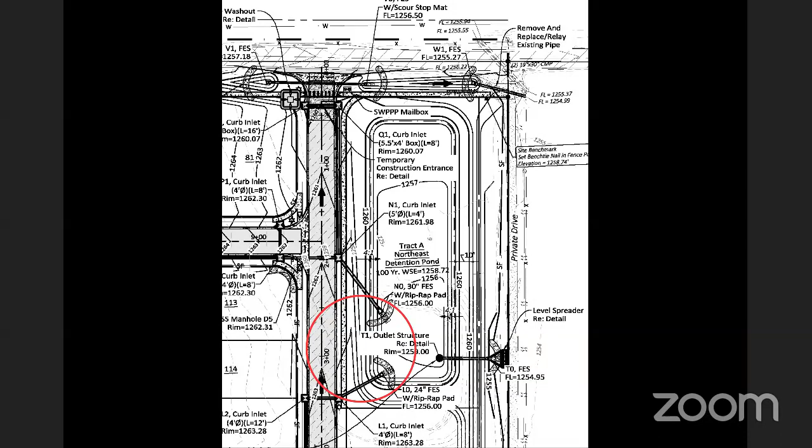I will make a note that Patrick asked for a waiver, even though it's not part of our packet. I'll make a note when we consider the motion. Thank you.

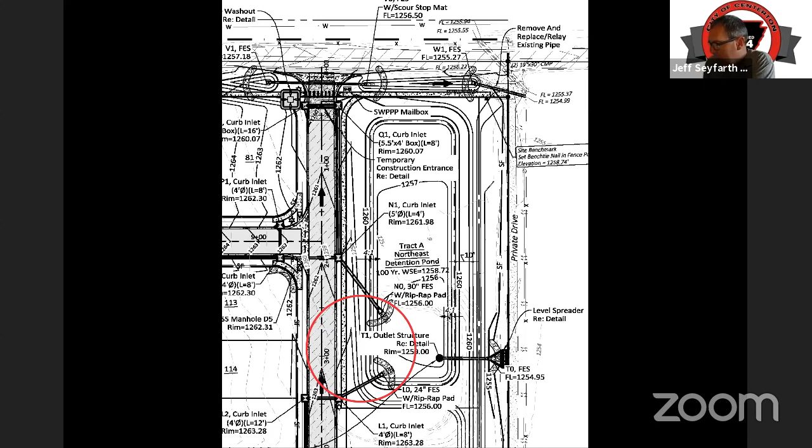Donna, anything else? Various cleanup notes. We do have some remaining comments, but nothing significant enough to hold things up.

So I made a note, let me know if this would be acceptable: since there are some questions regarding the adjacent street improvements, we could approve this in one of two ways. We could approve it so that it comes back to us for approval in the future under old business, or we could approve it so that it's approved with an agreed upon amount by staff. I don't know, Lorraine or Rick, if there's one way or the other you'd prefer, just let me know, and we can proceed on one of two ways.

I think typically we bring it back to you all so there's documentation of what's agreed upon. Perfect, that's fine with me. It's really just a difference of a $40,000 fee in lieu of, or a donation to the city as property. So it would be easy to bring back to y'all.

Okay, so regarding the adjacent street improvement agreement, we will see that at a later time for approval. And then, are there any comments, concerns, or questions regarding the waiver request for the 5-foot in the pond?

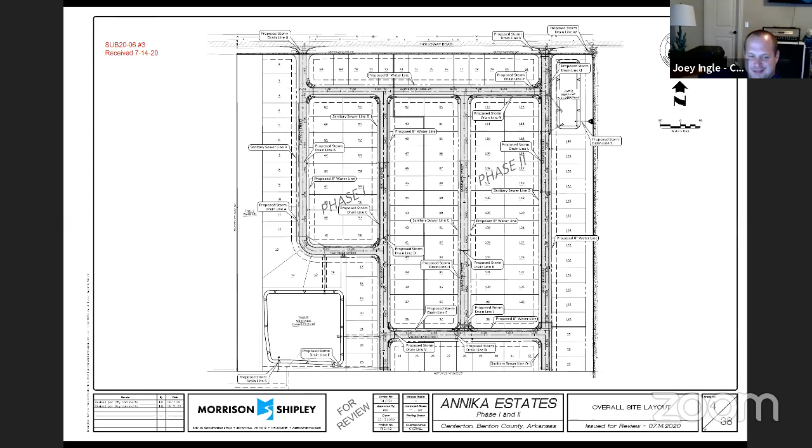Todd's got it on audio, so good luck with that. I got that. So we have a motion and a second. Is there anyone that's opposed? All right, thank you, guys.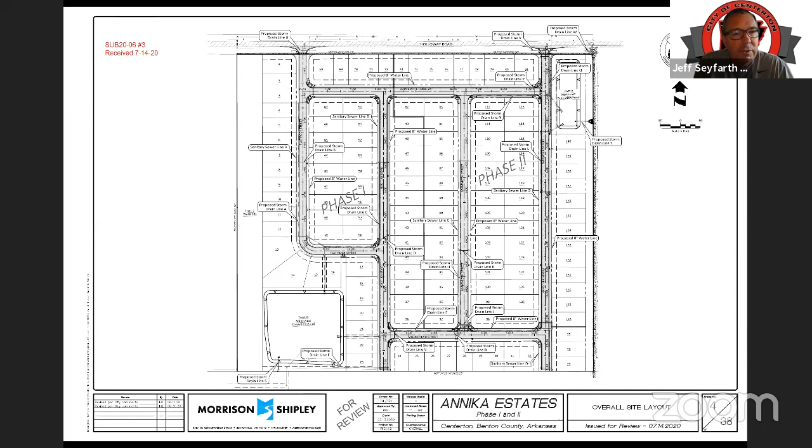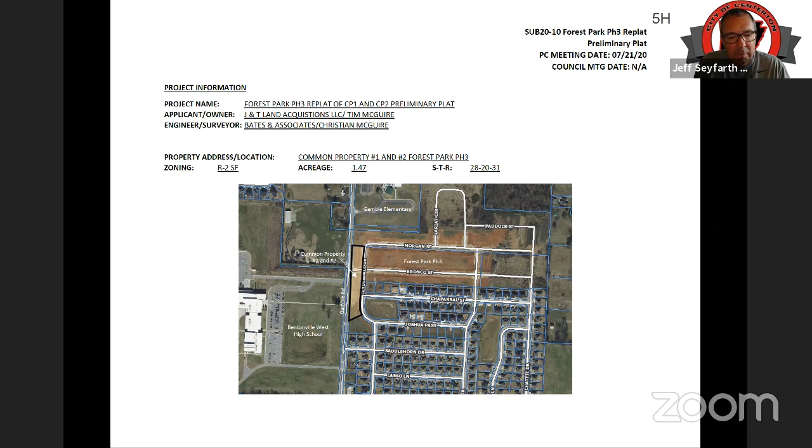All right, next on the agenda, subdivision 20-10, Forest Park Phase 3 replats of CP1 and CP2. I have a note that maybe Tim or I think Christian was not on the last one, but I don't know if it's Tim or Diane, if you're going to speak on this one.

I'm going to speak, but I see that Bates and Associates is still here, so maybe they would like to start it out. Is that Brett again? This is Jeff Bates again. Okay, sorry Jeff. When we originally did this, I guess the developer didn't really think those would be desirable lots. And since then, he's decided that they are, and we're just asking to replat this so they can build some homes there.

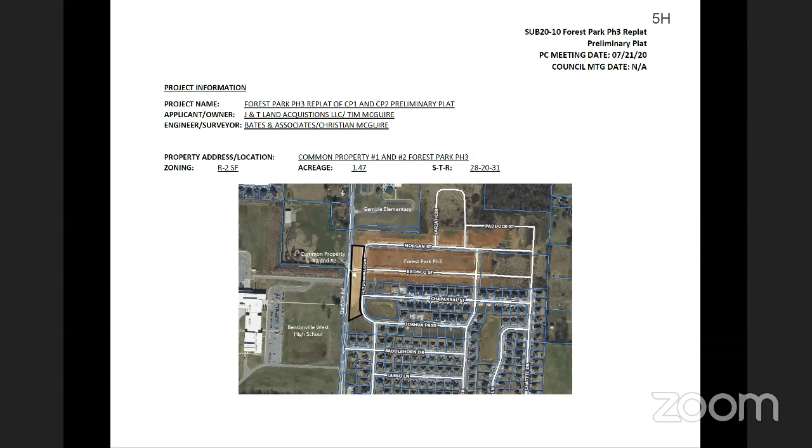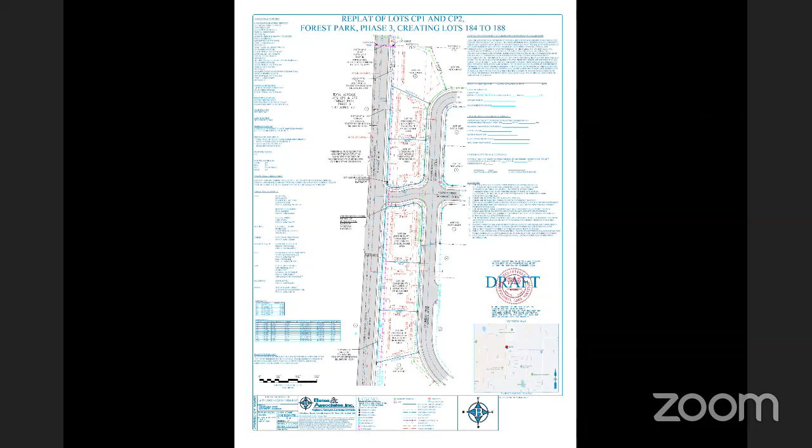She is readjusting. Any better? Yeah, not really. Nothing different from earlier. We're not going to be screechy.

Can you turn down your mic? What? Do a test for us, Diane. I couldn't hardly hear you there. Nicole said to test something. That's better, okay? This is better? We'll just have to listen very attentively. Well, usually I'm a loudmouth, so that's bizarre.

So, surprise, surprise that y'all can't hear me. Like I said, this was supposed to be open space for the development, and the final plat was approved by City Council in February of this year. Well, they would like to come through and make those two open properties, the open space properties, into five residential lots.

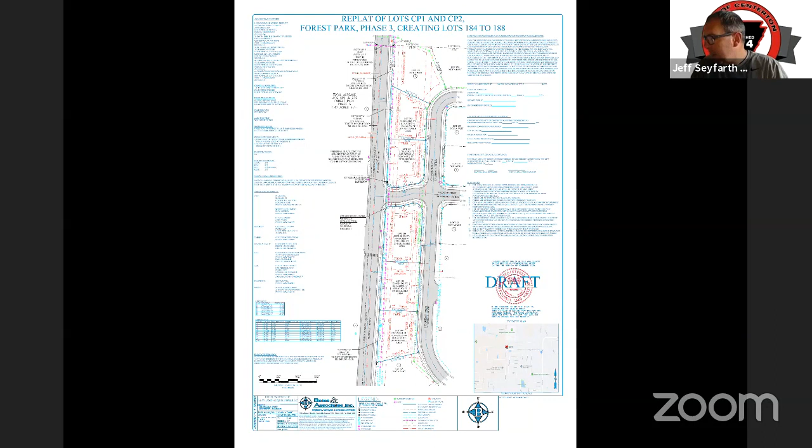All right, if there's no additional comments or questions, then I would entertain a motion for subdivision 20-10, the Forest Park Phase 3 replat of CP1 and CP2.

I also just wanted to point out real quick, there's not a grading plan included in this plan set, but it's pretty steep right up to the lots off of Clydesdale. So I'm wondering if the engineer can speak to what the game plan is, since they're shallow lots, for driveways onto these lots with the steep grade at the street.

Well, we don't typically do a grading plan on just individual lots, but what they'll probably do is just block the house up, and then grade around it to make sure the runoff gets around it and not create a steep driveway, so they should keep it manageable. If we did a grading plan, I'd know for sure, but since we haven't, I can't directly address that, but I'd say they'll just block it up and fill in around it.

And those, well, go ahead. I don't know if Rick or John want to speak to that. It's not a requirement. Tim McGuire raised his hand to speak.

He's the builder. Yes, I just wanted to answer that question. Typically, when we have a back to front sloping lot like that, we will drop the garage down 2 or 3 feet and design it accordingly to lower the driveway. Obviously, houses with real steep driveways don't sell as well as flat ones, so as builders we understand that, and we typically drop them down and put stairs into the house going up from the garage. If we have anyone handicapped, we'll do a handicap ramp up into the house and design that accordingly. I just wanted to answer your question on the steepness of the driveway.

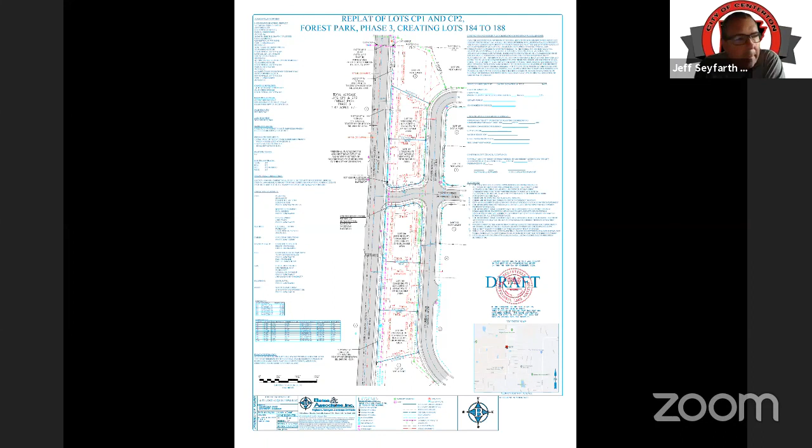Jeff or Tim, you guys okay with that? Can you hear me? Yes. Okay, we have already proceeded with that. An engineering company has already started the process of compaction testing, and we should have those results back soon as to what we have to do, and we will adjust accordingly as to what they advise.

Thank you, Tim. So if we make a note on this replat that before the building permit's issued, the compaction testing must be complete and presented to the city, you don't have an issue with that? I'm okay with it, but now you can put it in there now. It doesn't have to be before the houses, it could be done now. I'm open to whatever you guys want to do.

Yeah, and if you get it done now, that's just less you have to do later. Yeah, that's why we went ahead and did it. We understand, we know what we did and where the dirt is, so we understand what's going on there. Certainly, I, more than anybody, don't want any problems with the house settling. 540 houses to date, and I've never had a foundation failure, and I'm not going to start now. So if we need to do something, we will certainly do it. But that's already been done, it's already in the works, and we can give that to you shortly, probably within 3 or 4 days.

Tim, this is Lorraine. I have one more question, since this is a little different than what we typically do on a subdivision plat, because there's no grading plan. I was also told that all the utility connections are there. Is that true? Is there water and sewer connection to each of these lots already installed? Yes, there are, the water is. The sewer has been installed.

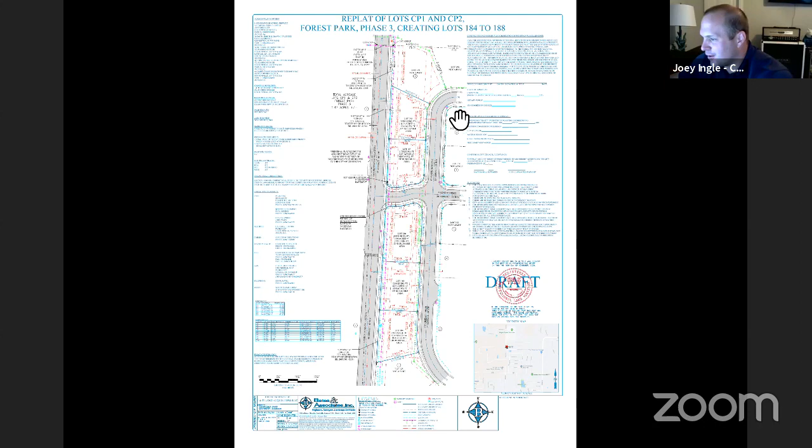There's no infrastructure to install. It's all already there. They would have to pay them for their taps, their sewer. Okay, is the sewer along the front of the lots? I can't see this. Sewer's on their side of the road. I don't think we have the water meters shown though, unless I'm missing them.

Well, yeah, the water meters were just set last week. Yeah, we didn't know they were set. Because Frank did say that they would have to get with him to determine the location of the water taps. Yes. Okay.

For our records, though, we will need those as-builts of utilities, where those sewer and water tap locations are, right? Yes. And then are any other fire hydrants or anything else required from anybody? I guess they look like they're set. Good.

Okay, because it's a little bit difficult when you have a replat of property, and you're platting 5 lots. If these had not had the utilities installed, like they were originally stated that they would not, then it would be a little bit different.

I think what you're thinking is, he didn't do it on purpose at the time, but it sure sounds like it's coming out that way. He just put the meters in last week, so he went and got those too soon, is what I understand, unless I'm completely wrong. The meters, but the lines were put in - service lines, but no, the lines were already there. You just set the meters. No, the city did the work. We didn't do the work.

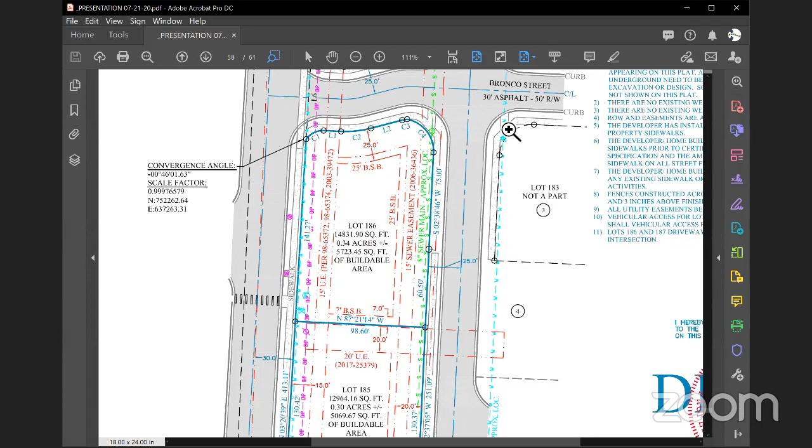Because Lorraine, this was filed as a preliminary plat. They did the preliminary fee, the preliminary engineering. Right, and that would be typical, and then they would go through and install - if everything's already there, all the taps and everything, which I understand the sewer taps are not - they would do whatever needed to be done to make those ready to build, and then it would final plat. I think there's just some real simple things that they needed to do, so it may be able to go into final plat.

I wish Frank was on the line, because I think he's the main one that would know. Electric's in place, water's already there, sewer's already there. We just really did turn them into lots. It's just a matter of getting the sewer and water taps in there. That's all there was to it. Gas is already there, everything's there.

And did Frank ask for an as-built of the utilities? Did Frank ask for one? Yes. No, I was just going off the summation of comments that the Centerton staff put out that I was given by Christian from Bates. I just looked at everything that needed to be done and started doing it. Yeah, and Frank was also under the assumption that this was a preliminary plat and not a final or anything requiring any as-builts.

Frank was looking at this as preliminary plat approval. Then he will make sure everything's on the lots, and then they will get final. Is that what you understood, Diane? Yes, that is correct. Well, I don't understand what that means. If everything's already there, when you do a preliminary plat, it's just ground, and then we come in and put all the roads, water, sewer, storm, all that stuff, and then we do a final plat. Well, all that's there.

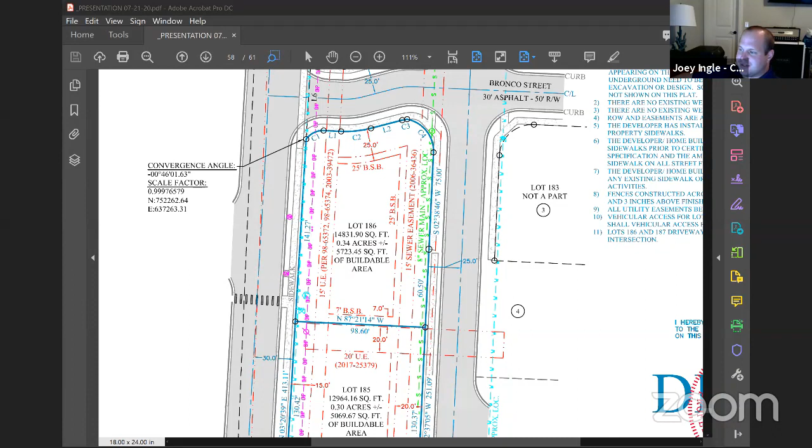I don't think your utility infrastructure was in, Jeff. It's just service lines now. They're just doing a tap. Correct. And as part of the final plat, you have to locate those services. So I don't know if you can get away with just an as-built or not, but I think that's what Lorraine's trying to say here.

Well, that's what it sounds like. The easiest thing would be to do an as-built instead of waiting another month and coming back and y'all look at exactly the same thing, and we just have as-built plans. I don't know, I'm trying to make it easy for everyone. I think where the hangup was that if you replatted up to 4 lots, you didn't have to go into it. You happen to have, was it 3? I didn't know, somebody said 4, but so we have 5. So I think that's what tipped the scale.

But you don't have the services already existing and shown. Here's what I propose. I propose that it is a preliminary plat at this time, during the next 2 weeks until the next meeting on August the 4th, then we could come back with a final plat, make sure that we have everything we need for the utilities, and it will still meet the same deadline, going to city council for approval of the final plat.

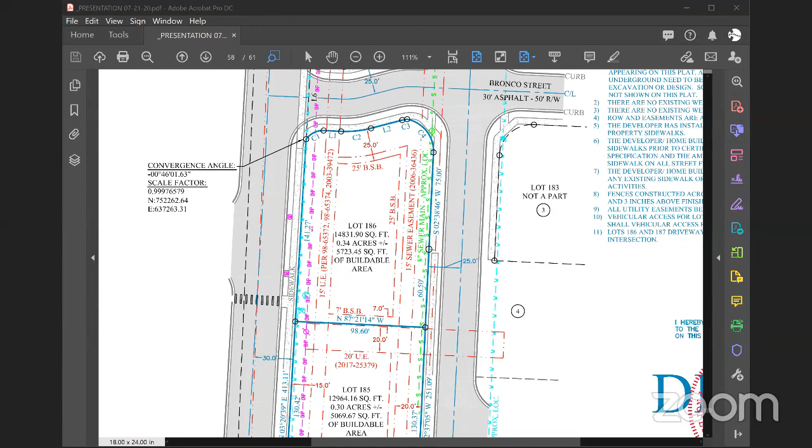Well, can I say one more thing? It says on the new business order that this is a replat. You are replatting, but they were not, they're common lots. You do have access to water and sewer, but the timing is going to be the same. And this way we can talk with Frank and see what he needs before this plat is filed.

And also, you said that you've been getting the compaction tests, so I would say that's something, was that on Robbie's list also? Yes, and having that's compaction tests. So I believe that those things would be, that they were looking at this as preliminary, like a normal subdivision. And because that's what we would do, even if we split a lot, we make sure they have that tap in or that the other utility connection before we file that plat.

Understood. And it was voiced to Christian and also Tim that this was preliminary. It was going to have to go through everything. It wasn't a do this and you're done and you can final. It's not a big deal, we can wait. It's going to go to the council the same date, but we'll just be tying up the loose ends. Okay, and the council is on the 18th.

No, the 11th. Okay, we can come back then. Okay, and then the next meeting is on the 4th. So that's a week before council. Sounds good. Okay.

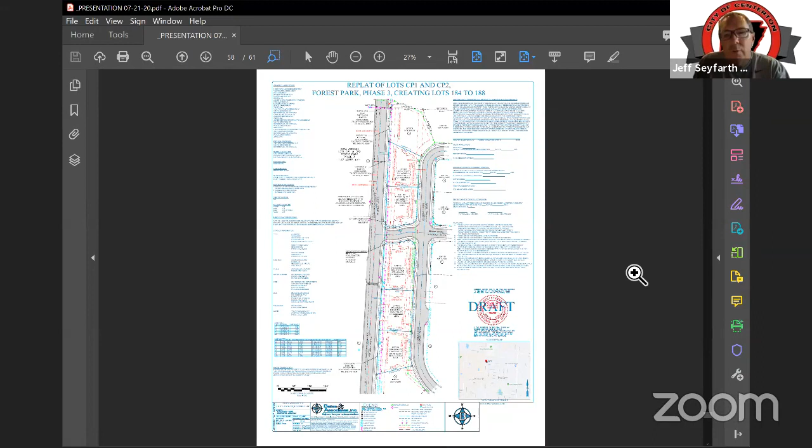All right, thanks Tim. Oh, you're welcome.

Thank you. All right, next on the agenda this evening under other business is a proposed amendment to Title 13, the bylaws for 9 members on the Planning Commission. Today the way it's set up we have 8 members, and as we were going through the candidates we had a good discussion with the mayor and with Lorraine regarding the opportunity to potentially add and go to a 9th commissioner.

And with that, it would also allow us to not have a tie if all members were present. Today we could actually end in a tie, which is not a good thing. In my time I think we've probably done that once, where we had to go back and forth a couple of times, if memory serves me correct, Devin. So this would allow us to go to 9.

Lorraine, I don't know if you want to give any other feedback, but it's something I'm excited about. It gives one more person the opportunity to serve the city and be on the Planning Commission. Lorraine, did you want to add anything?

I don't really have anything to add. I do think having 9 people helps, sometimes it's that tiebreaker vote. You don't want to get too many different opinions, but I think 9, as we're growing, will be a good number.

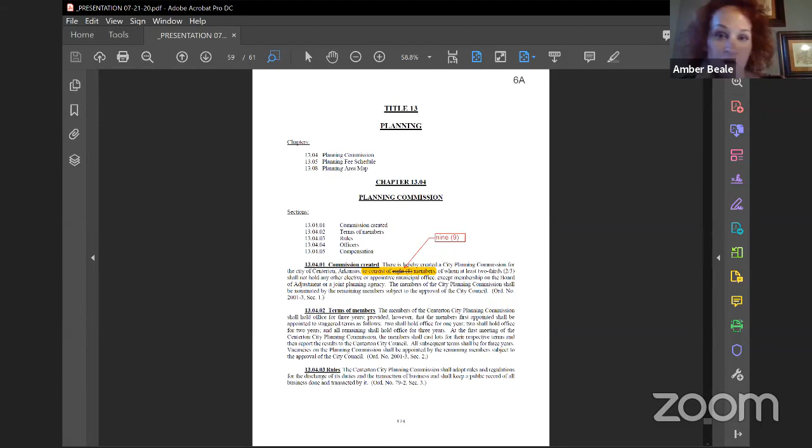I noticed a discrepancy on the Bliss project. The agenda is showing subdivision 19-19, but the project packet is showing 19-12. I just wanted to make sure the correct number was approved. Look at you, that's what I'm talking about, Amber. You are good. I think it should be 19-12, is that what you gave us?

Nicole, do you know what the correct number is? It should be 19-12.

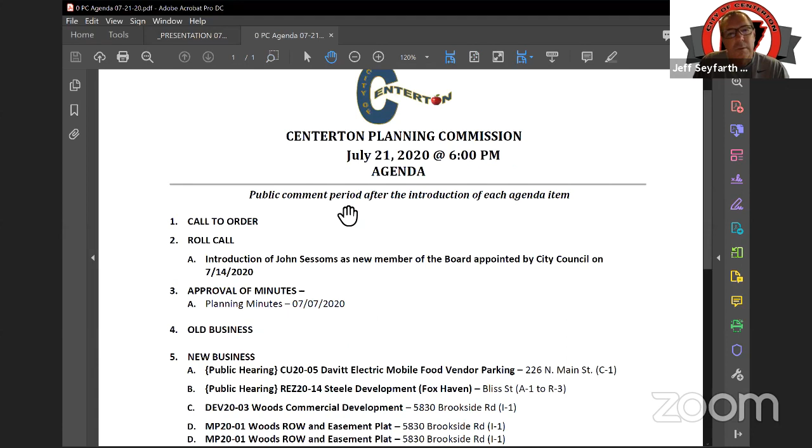Todd, do we have to go back and change anything, or can we just make a note that the intended purpose was there? Sure, I made that motion and read it off the agenda, so it would be wrong. I don't even think we have a 19-19, do we? No, that's Tuscany Phase 3, that's 19-09. I don't think we have a 19-19 either.

So I believe it would be easier to amend the motion to include the correct number, if Nicole and Lorraine agree with that, rather than go back and correct all the paperwork. Tiffany, I think that was me, wasn't it? That's been a while ago. What, you didn't make notes of everything you approved? No, Todd does that. Actually it was Tiffany that made the motion, because I asked her to include the waiver.

I'll amend my motion for project subdivision 19, what was formerly known as subdivision 19-19, to be the correct number, subdivision 19-12, Street Twin Homes preliminary plat and plans, also including the waivers. I'll second that again, so Todd doesn't have to pull his hair out. I appreciate it, actually all of my notes already have 12 on it. All right, is anybody opposed to the amendment for what was known as 19-19?